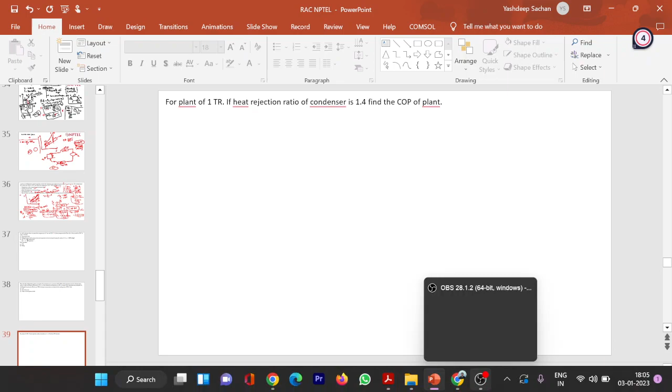For RAC, it would be finished, no issue. After psychrometry, I would take equipment, various types used, and for how much capacity. So RAC would be covered in our scheduled classes. Apart from that, for 1 or 2 classes if some topic doubt is there, we can take that extra. It would not be on the website actually.

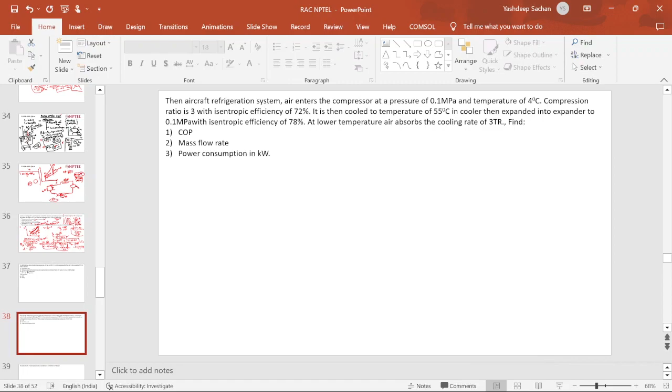Today we will be here for 50 minutes, so more than that we would not be able to do. So I would say you first read this problem, which is visible on the screen, right? Yes sir. First read this problem, then this problem, so you will come to know what is different here.

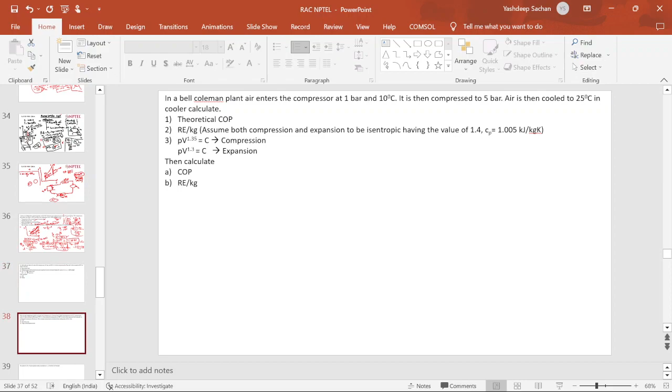If you correctly do both these problems, then for the reverse Brayton cycle you would be able to do each question. Apart from it nothing will be there, some efficiency here and there, and you can take care of that. Read this problem, and try along with me. I will ask for the values, you let me know. Read it, and then we'll start in 1 minute. If anyone wants to solve, I can wait for 2-3 minutes, and then we'll start.

I will read also: in the aircraft refrigeration system, air enters the compressor at a pressure of 0.1 megapascal and temperature of 4 degrees Celsius. Compression ratio is 3. Isentropic efficiency - we will write the given data.

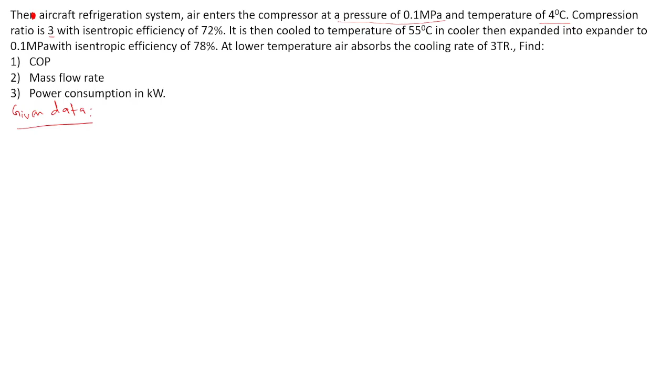We will make the T-S diagram, then it would be better.

Which would be the inlet to compressor here? 2, 2. So P2 is given as 1 bar or 0.1 megapascal, and what is T2? 277 Kelvin, right? And this is P lower, 1 bar or 0.1 megapascal or 1 bar, and it is P higher, how much? 3 bar, right? Is it clear?

Sir, this cycle starts from compressor? No, that numbering you can take care of. I have written here 2, so P2 T2 I have said. It is not much, because we will follow the convention. We have said initially that inlet to the evaporator we are going to take as 1, so same way we are doing. Okay sir.

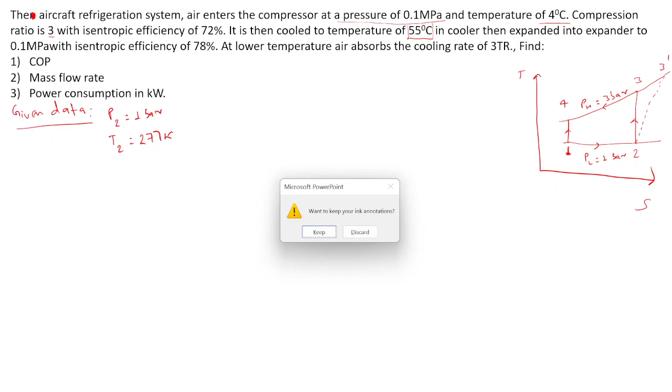Then it is cooled to temperature 55 degrees Celsius in the cooler. What temperature is this 55 degrees Celsius? Which temperature is this? Am I audible? Yes. So anyone - till it is then it is cooled to 55 degrees Celsius in cooler. Which temperature is this in the cycle? T4, T4 na? So T4 is 55 degrees Celsius. When you convert to Kelvin, it will become 327 Kelvin, right?

And in the cooler then expanded into the expander to 0.1 megapascal with isentropic efficiency of 78%. So here again efficiency is there, so this is 1 dash. We don't know the temperature here, 3 dash and 1 dash. We know the temperature of T2 and T4, right? And P2 and P4 also we know, P4 is 3 bar. So here you have to find the COP. What would be the COP here? Anyone?

Hello? Hello? Yes sir. What would be the COP here in the cycle?

Refrigeration, desired effect by work input. What is the desired effect here? 3 into 3.5167, okay that is fine. But in the cycle, in terms of enthalpy, what is the desired effect? H2 minus H1, is it correct?

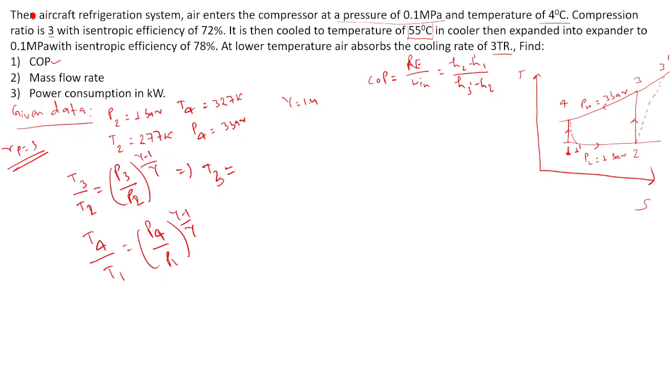Here how will you do it? T4 by T1 is equal to P4 by P1 to the power gamma minus 1 over gamma. So here T4 you know, T4 is 327. So from here tell the value of T1. Calculate it and let me know.

First tell the value of T3, okay? Anyone doing it? Yes sir, okay okay. 379.13 Kelvin for T3. Some other person will also try and confirm this value.

And what is T1? T1 getting 239.64 Kelvin. 9.64, huh. Is it correct, anyone? Anyone also trying or not? Yes sir, yes we're trying.

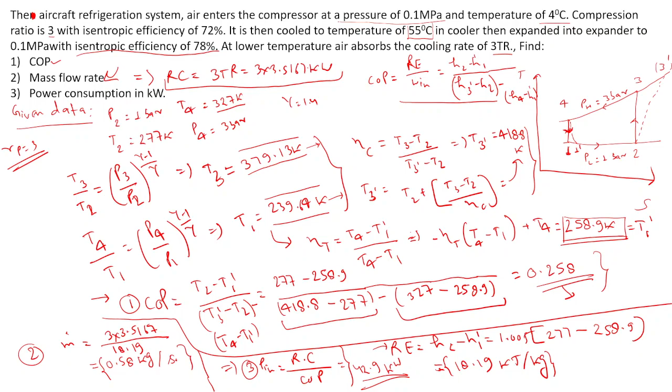So in this problem, you have to find the various temperatures, and when you know all the temperatures, you can find the values here. If any major doubt, tell me. Otherwise, there is another similar but different problem, where you will come to know this way also might come, and one doubt will come, that we'll see. Otherwise, we'll switch to the next problem. Shall we go to the next problem? Yes, sir. Okay, read this, and then we'll start.

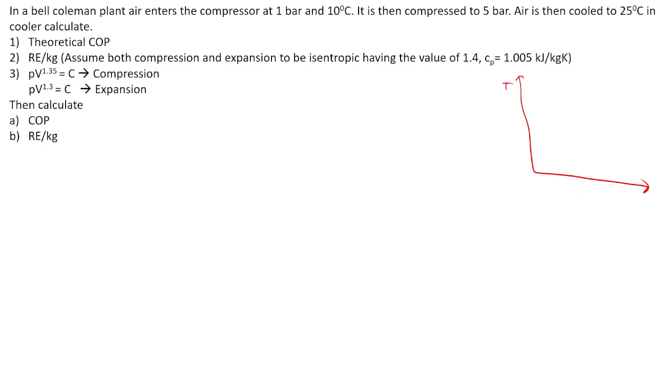So it is also like in a Bell Coleman plant, air enters the compressor at 1 bar, 10 degrees Celsius. It is then compressed to 5 bar. Air is then cooled to 25 degrees Celsius in the cooler. So the same data is given here also. So T-S diagram. Let's suppose we will give 1 here, 2, 3 and 4. So this way it is there, okay.

So first we have to calculate the theoretical COP. So how will you do this? 1 minus RP to the power... Gamma you can take, okay. Here for the first two problems you can take gamma as 1.4. So the first problem is easy. Let me know the value of that. 36.86%. Sorry, 0.3686 COP.

Yes, sir. Is it the same for others? 1.713. Okay, two people answered. First, how much? 0.368. Okay, another 1.713. Any other answer? 0.368.

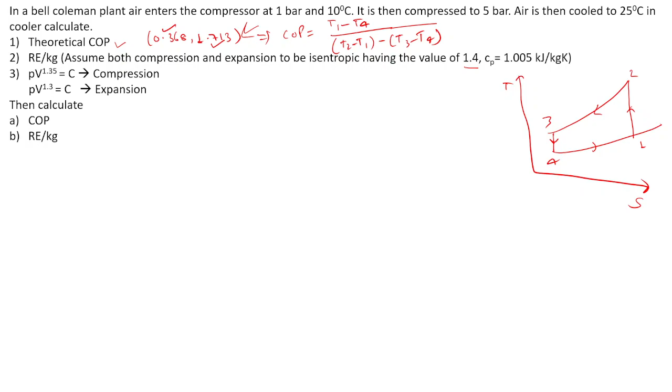So here we will first write the given data. P1 is 1 bar and T1 is 283 Kelvin, and P2 is given as 5 bar, and T3 is given as 298 Kelvin. So let me know the value of T2 and T4. How will T2 come? T1 into Rp to the power gamma minus 1 over gamma. And how will T4 come? T3 divided by the same factor. Is it correct?

So let me know the value of T2 and T4. T2 is 448.22. 448.2 Kelvin, right? And what is T4? 188.15 Kelvin. So now we know T1, T2, T3, T4. So from here also we can get the COP. Both would be the same, maybe a little difference in decimal places. So now the refrigeration effect per kg.

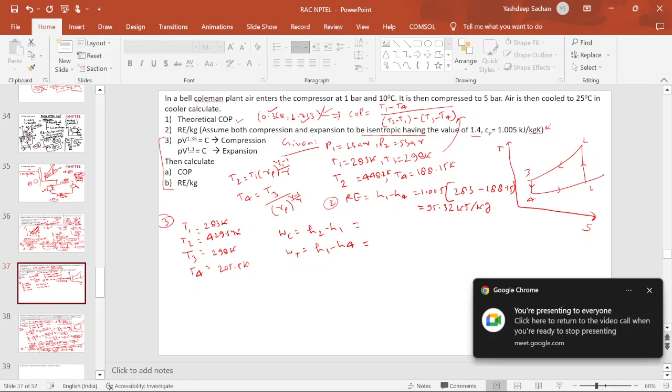Okay, one more hint I will give. What is the work done for the open system for the polytropic process? P1 V1 minus P2 V2 by n minus 1 into n. Means n by n minus 1 into P1 V1 minus P2 V2, right? Means initial minus final into n by n minus 1.

So for the compression it is the same way, and for the turbine it would be n by n minus 1 into P3 V3 minus P4 V4. Would both values, H2 minus H1 and this value, be the same? If you have no idea, then find both values. I think two times I have told the same thing initially, but you forgot now. Because this is the only problem where you can commit a mistake. That's why I am taking time here.

For isentropic and reversible, we can do H2 minus H1. Here we can't do it, right? Why? They have not given reversible. But it is an open system, right? For an open system, we can write the work done in terms of enthalpy difference, or any other explanation you can give, because for an open system enthalpy difference will show the work, right? Or some other assumption is there. I am asking you. I may not be correct here.

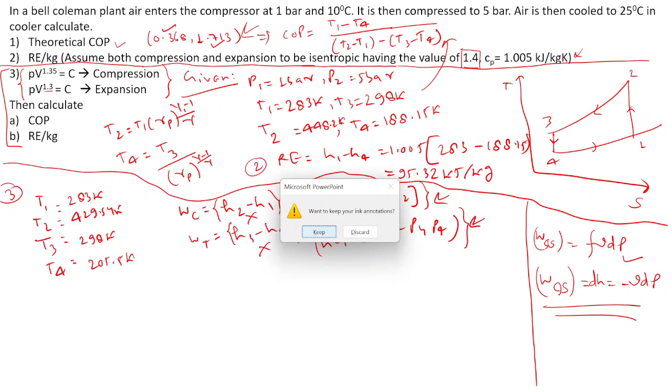Yes, sir. Sir, if gamma is equal to 1.4, then H2 minus H1 is valid. Then it is a simple problem. So here it is a polytropic process, and I think I can show it here also. In the first class also I told, right? Work done for open system is this, and this is the general formula; when we integrated it, this came, right?

Hello. Yes, sir. Yes, sir. Yes.

And here assumptions are these, and again for open system it is H2 minus H1, that I asked that time. How it came? That time you told we use the steady flow energy equation, and when we consider this is an adiabatic system, then Q we make 0, and no speed means velocity and distance from datum is same, so that also will turn off. So work done for open system will become only H1 minus H2, correct?

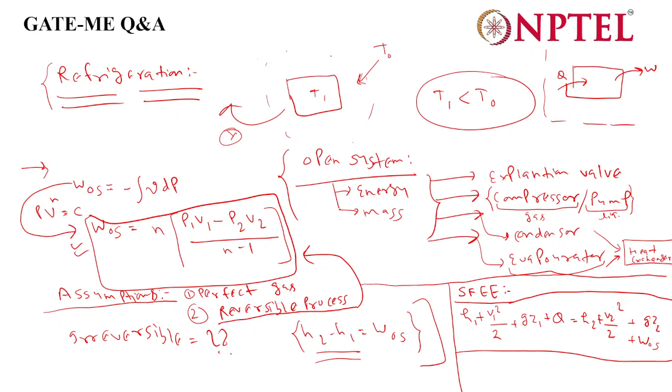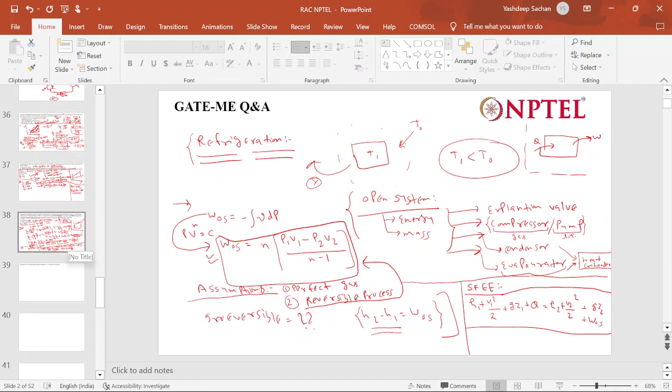Yes, sir. So from here it is correct or not? Like if system is adiabatic, then for open system the work done would be the enthalpy difference. But if system is not adiabatic, then it should not be like that. Then it would be the dH plus whatever the amount of heat transfer would be. That also will come into picture, right? Now are you getting why we can't use that? Yes, sir. Because that is the only one point where you conceptually can commit a mistake. So that's why I am staying there.

1 minute. Sir, reversible adiabatic, reversible adiabatic, and isentropic. Means isentropic means reversible adiabatic, isn't it? If reversible adiabatic is there, then it must be isentropic. Okay. Yes, means if they have given isentropic, then we can use that formula, H2 minus H1. Yeah, yeah.

If here in compression and expansion they are saying reversible adiabatic or isentropic, then you have to consider reversible adiabatic only. If directly a theoretical problem will come, then only you have to think, okay, all reversible adiabatic are isentropic, but all isentropic are not reversible adiabatic. This sentence makes sense to you or not? Yes, sir. So that time you have to consider. Otherwise, if in the problem simply isentropic is written, then you have to consider reversible adiabatic. Okay.

And if just reversible is mentioned or just adiabatic is mentioned, then we can't use this delta H. If they have given adiabatic also, then you use it. So if here they have directly written PV to the power 1.35, it means you cannot use that. Here explicitly you can see. They will not trap you like it is isentropic and then say no, some internal irreversibility is there and it is compensated by heat transfer. If that would be there, then separately they will write that. If simple isentropic is written, then you have to consider reversible adiabatic. Nothing to think much. Okay, sir.

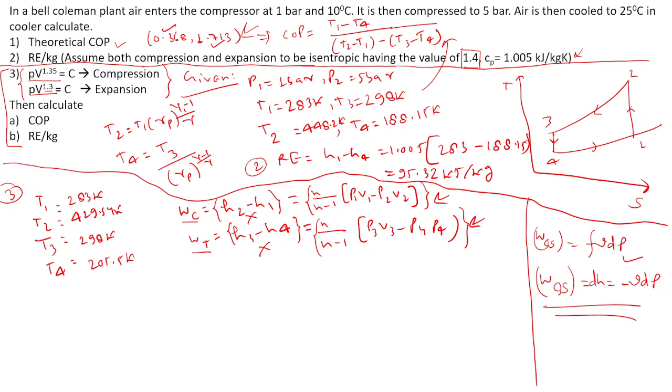So now can you tell work done for compression and work for the turbine? Here in P1 V1, volume you don't know. Do you know how you can do that? For per unit mass you can do that as R into T, right? R into T1, R you can take as common, and T1 minus T2, T3 minus T4. Is it correct or not? Hello? Yes, sir. So work done for compression would be N into R by N minus 1, T1 minus T2.

And for work done for turbine, N would not be the same for compression and turbine. So for compression take 1.35, for turbine take 1.3. So N R by N minus 1, T3 minus T4, and the values for all you know from here. So just quickly let me know the value of WC and WT. Sir, here we have written PV is equal to MRT form. M we have taken as 1 here. Okay. We will write work done in kilojoule per kg format. Okay.

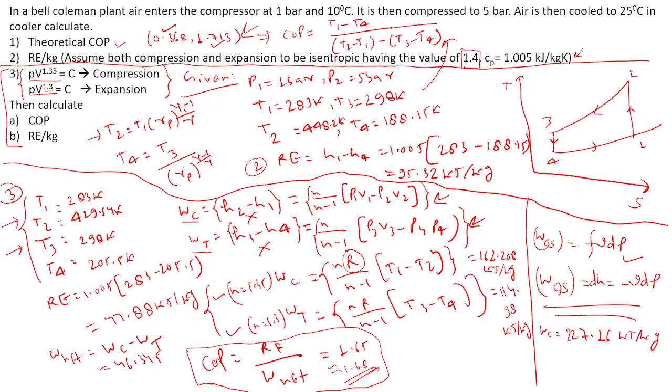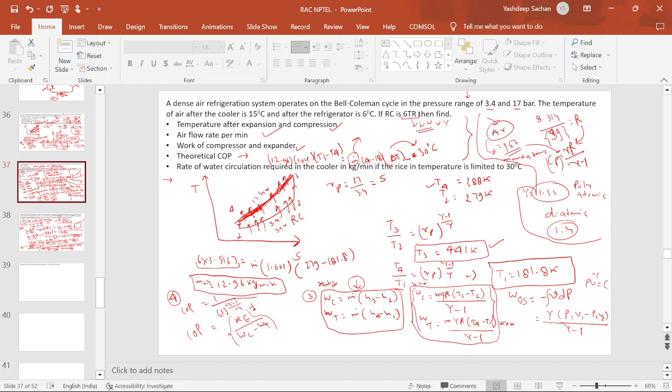So my main aim is, if a problem comes this way, where they changed the compression coefficient, expansion coefficient, how to tackle it. You can do it this way, right? Yes, sir. So today this one main problem I wanted to tell. In reverse Brayton, I don't think apart from that anything will come. Some reheating may add, but this variation is more than enough. So one simple problem in 1 minute we can do, and then we'll start next Sunday.

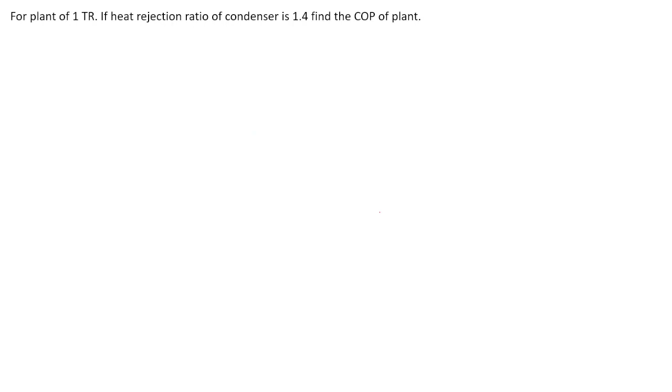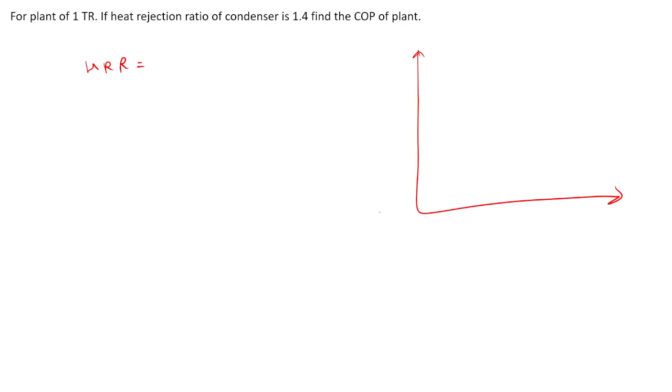So what is the heat rejection ratio? Anyone know? Heat rejected to heat taken. Heat rejected by work input. QL by W in. No, heat rejection ratio is the heat rejected in the condenser to heat absorbed in the evaporator. Q condenser by QE. So if this is given, heat rejection ratio of condenser is 1.4, find the COP. Can you do that?

Okay, I will do it once, and then remember that formula. Let's suppose this is higher temperature, this is your system, work input. So the refrigeration effect would be this, and this would be refrigeration effect plus W. This is the condenser. So what would be the heat rejection ratio? I am just trying to give the formula in terms of COP, because simply a one liner problem will come for that.

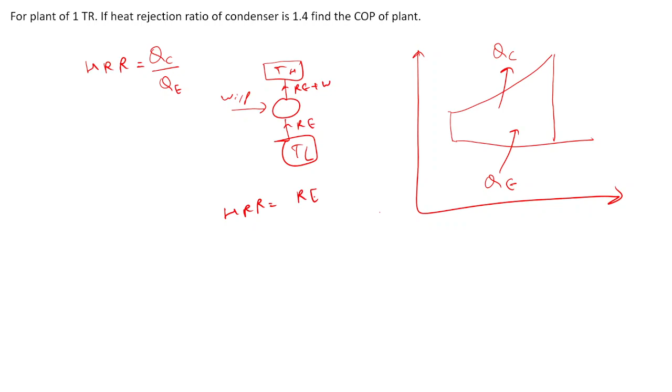Refrigeration effect plus W divided by refrigeration effect. So this will become 1 plus W by refrigeration effect, which is 1 plus 1 by COP. So that is the heat rejection ratio. If heat rejection ratio is given, then you can find the COP of the plant. 2.5. It may vary, 1.5, 1.3, anything. So 1.4 equals 1 plus 1 by COP, 1 by COP is 0.4, so COP will become 2.5. Is it correct?